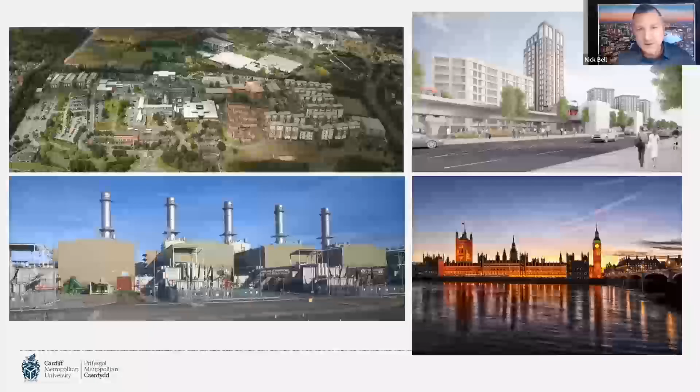So about me, I do lots of talks, or did lots of talks before I retired, about CDM. I talk around my PhD. I talk for professional bodies and I've won awards for my work over the years. I'm honorary principal lecturer at Cardiff Met. We got the University of the Year award in 2021. And when I'm not delivering training, I advise clients and architects and other people on building, maintaining, demolishing, everything from large estates to the Palace of Westminster. I write articles and things like BIM. I rewrote the CDM section of the 10th edition of the RIBA Job Book.

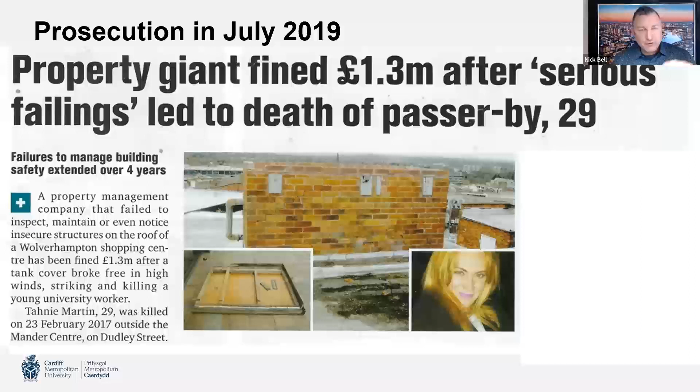So we're going to start looking at a few relevant prosecutions. Some of you may know this case study better than me. One of my clients got a £1.3 million fine a few years ago for their part in killing a woman. The building was the Mander Centre in Wolverhampton - I'll show you that in a moment. It had a number of wooden elements on the roof, which were very difficult to access for maintenance or inspection. So what happened was the wood rotted, it got hit by wind. In the bottom left, you can see the lid of a big wooden housing for a water tank. That got blown off, shunted over the lip of the roof, and it landed on the woman, killing her outside a Starbucks. My client pleaded guilty and got the fine because they accepted they could have done more in highlighting the fact that there were difficult to access parts of the roof.

However, if we do a root cause analysis on this and go all the way back, the original designers came up with a building that had wooden components on the roof that's obviously going to rot, and they built the roof in a way that was difficult to access and maintain. This isn't strictly M&E really, but just to show you the magnitude of the fines we can get if we hurt members of the public.

We're going to move on to look at some case studies and prosecutions around lack of safe access, particularly around working at height. This was a big case study at the time.

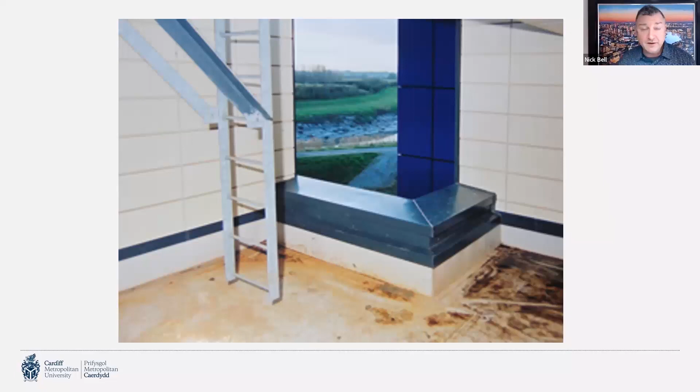An architect got fined for their part in killing somebody. This is a plant room we're stood in, and that ladder is going up to more plant above our head. You can see there's an opening in the side of the building, and from the height of the rungs, that parapet's about as high as the back of your knee. So a mechanical contractor comes in to do some snagging after handover, climbs up the ladder, slips and falls over the parapet onto the back of his head and dies. Completely avoidable death. Turning the ladder around, moving it somewhere else, or actually replacing it with a staircase could have prevented a fatality. And quite rightly, the architect got prosecuted.

This is a masterstroke of design where if we walk up on the left-hand side, we brain ourselves on the concrete planks. If we walk up on the right-hand side, we get lower and lower and lower as we hang on to the hand railing. The final solution was a set of ship's ladders through a coffin lid onto the roof.

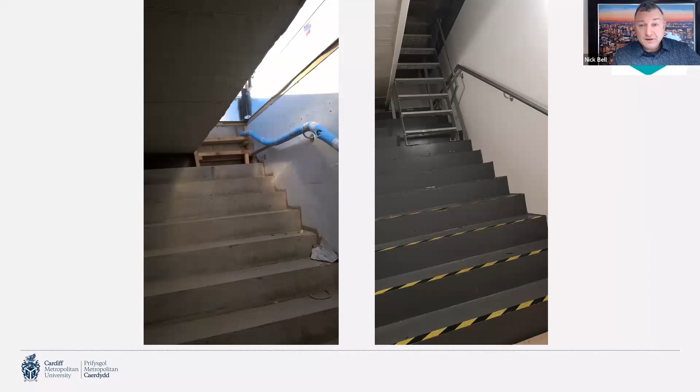We had words with the designers after this had been installed and challenged them by asking them to consider they've got a box of tools, a filter, a spare part of a motor or something on the roof. How do you get it up the stairs? Well, I don't know, it won't fit. Well, that's not a reasonable solution then.

And as a client, we learned from this and created a design guide for future projects, requiring that any access onto a roof where we need to do maintenance should be by extension of the stairwell. We're not going to accept ladders in these kind of situations.

Just a few more case studies, and these relate to coordination or consideration of M&E services. This is a new air handling plant going on to an existing roof. By the side of it is a Georgian wired fragile skylight. An apprentice fell through, broke his ankle or his wrist, but very easily could have sustained life-changing, life-ending injuries.

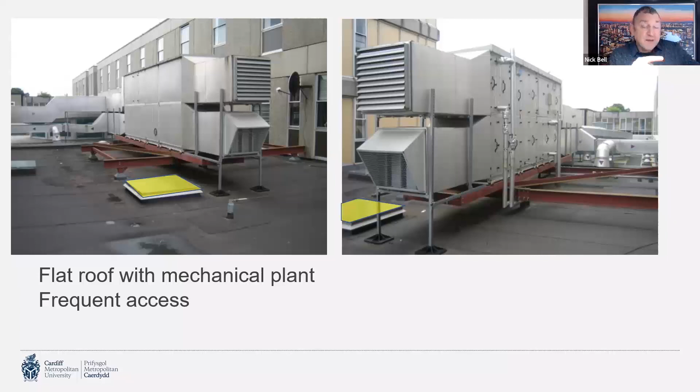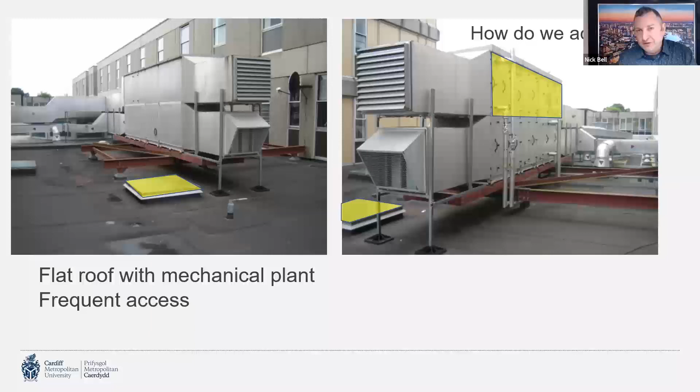So what we have here is a designer not taking into account the wider context of the design, just focusing on their plant, not thinking about hazards in the area that people can be exposed to through the life of this building. Also a complete failure to consider access to these higher cabinets. These units could have gone side by side. If they had to be double stacked, then let's give people a little solid plate across the steels to stand on. At the moment, they're going to be standing on the steel work, tripping over, puncturing the membrane. So not a practical design for future maintenance.

What should be happening instead, this is BSRIA BG6, an image from that guidance note. You may not be familiar with it. It would tend to be used on slightly more complex, larger projects. But at RIBA Stage 2, and I'll talk about the RIBA stages later, RIBA is the Royal Institute of British Architects.

If we don't do that homework, we'll instead end up with situations like this, where we had literally inches between pipes and unistrut. We challenged the design and build contractor, the D&B contractor. Their initial defense was there's nothing in the building regs, mate, saying that you need to give people reasonable access. Unfortunately, it ended up in arbitration. The client won. It was upsetting and expensive. All of that plant gets stripped out, gets replaced. So from a sustainability point of view, it's just awful.

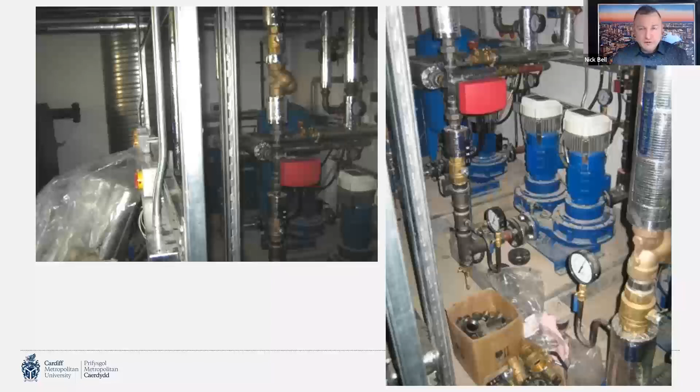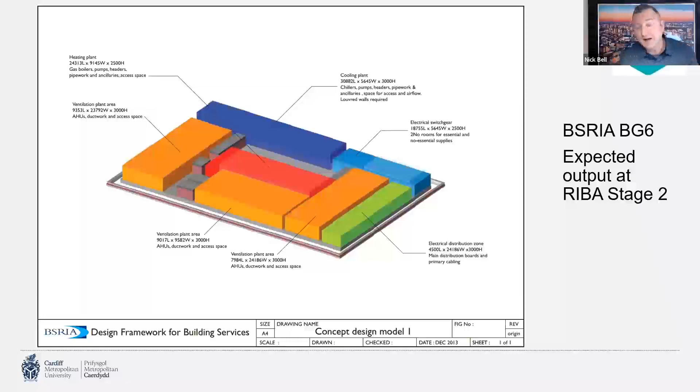And while it was right that we point our finger at the D&B contractor, again, looking at the root cause of this, we could go all the way back to RIBA Stage 2, where there wasn't an adequate analysis about what the actual plant room requirements would be. And then also at RIBA Stage 2, we should understand what the service riser zones are going to be through the building.

So we've set ourselves up for a catastrophic failure. I sat down with the client's principal designer and principal contractor, and in front of the client, they were arguing over who should have been looking after this design. It came across to the client like it was the Wild West, with people just making up their own minds where they put their pipes.

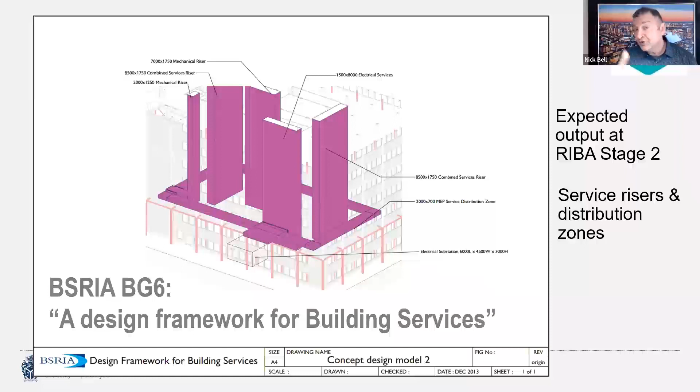If we'd done a proper exercise like this at RIBA Stage 2 concept design, we should have realized early on there was a risk of water services passing over electrical switchgear, and we would have changed the design.

These are water tanks at the top of a very large building. Somehow, simultaneously in the future, contractors will need to hang onto the ladder, reach over, lift up the lid, dip a ladle in to do dip tests for Legionella or other maintenance tasks. Unless you've got three pairs of arms, that's an impossible task. And that further lid is completely inaccessible from the ladder.

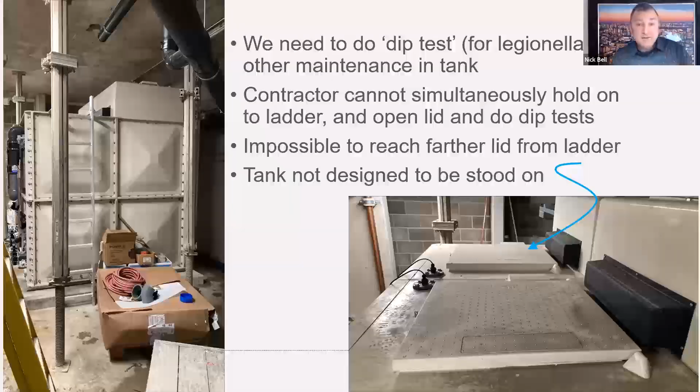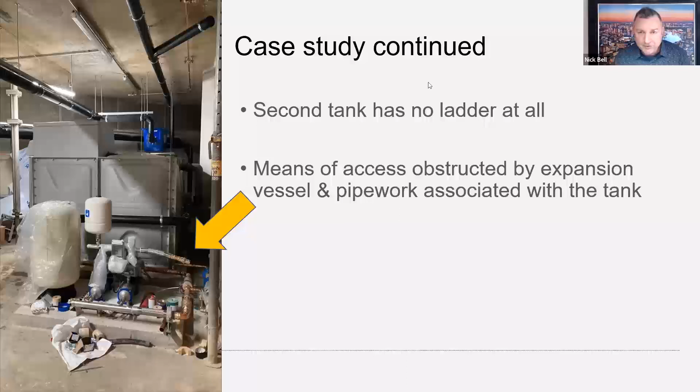And in the same development, there was this second tank. Theoretically, we could have moved a tower scaffold up against the side of this tank to reach the lids, but with all the expansion vessels and pipework, that was just an impossibility. So again, we've got designs that are unmaintainable.

This means that even in the spatial coordination we're doing at RIBA Stage 2 and Stage 3, before planning permission, we should have a clear understanding about the elevation of the pipes within these openings. That needs to be considered alongside things like the fire stopping specification to make sure all of this works. If we don't consider these things early on, facilities managers end up retrofitting fire stopping solutions, and this is just completely woeful.

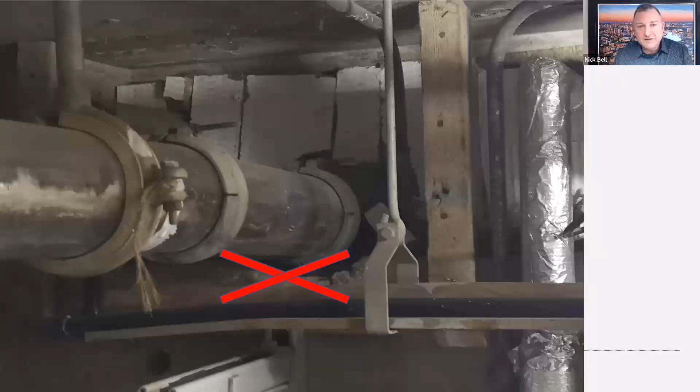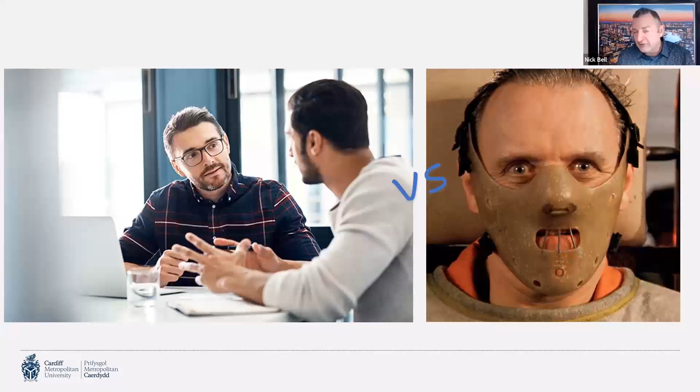So why does all of this happen? I'll get into psychology in a bit, but most architects I deal with, that you'll be dealing with, are professional, humane individuals. They're not psychopaths, they don't want to hurt people, they don't want to create problems in the future, but still things are going wrong. I think we can look at both individual and organizational reasons behind this.

Individually, they might lack awareness due to lack of experience, knowledge, or training. Therefore, they can't visualize the maintenance tasks their designs are going to generate, and therefore they can't appreciate the challenges or risks involved in those maintenance tasks.

From an organizational perspective - apologies, I'm just going to read a wall of text here - facilities management is a bit of a back of house function. It's not making money or providing services for the client, and I think therefore it's not at the forefront of the client's minds. I think other factors get prioritized instead, like completing designs on time to allow construction to start.

I have to wonder whether we always set realistic time scales and resources for projects. If we don't, we're not giving people enough time to consider the whole life implications of designs. And if we're appointing specialist contractors like those fire stoppers too late, we can't incorporate their requirements into the earlier phases of design, such as the location and positioning of pipework within these openings.

I think that project processes are skewed. If you look at a typical template for project meeting minutes, it's probably asking questions like, is the design progressing on time to allow us to start construction on time? There's probably not that many prompts about whether we're happy that the access and maintenance strategy is suitably developed for this stage of design, or whether we're satisfied that the client is aware of and happy with the residual risks this design will leave them to manage. And if you look at things like liquidated and ascertained damages in contracts, people will be punished for not completing designs on time to allow construction to start. If that's what the contract says, clearly that's what they'll focus on, not the whole life implications of their design.

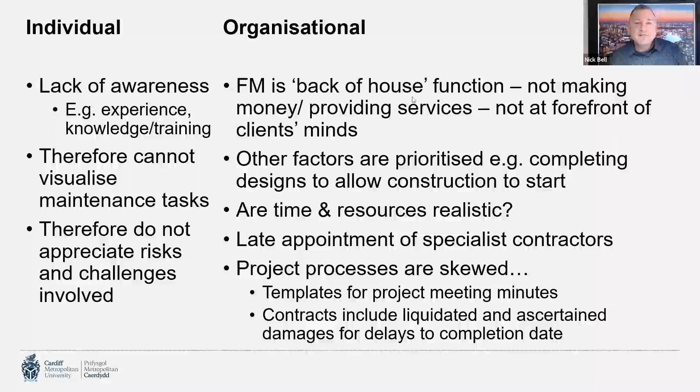I'll talk later about how we can overcome some of these challenges. Oh, it's frozen again, Richard. There we go, well done. We're going into the psychology.

There's something called melioration bias, where we've evolved over tens of thousands of years to survive, partly by prioritizing immediate consequences over distant and uncertain ones. We might see this with teenagers, for example: if I don't study for my exam, I might fail it in some months' time, but that seems less relevant psychologically than the certain immediate consequence of going out with my mates tonight and having a really good time. Those immediate certain consequences feel much more relevant and important to them.

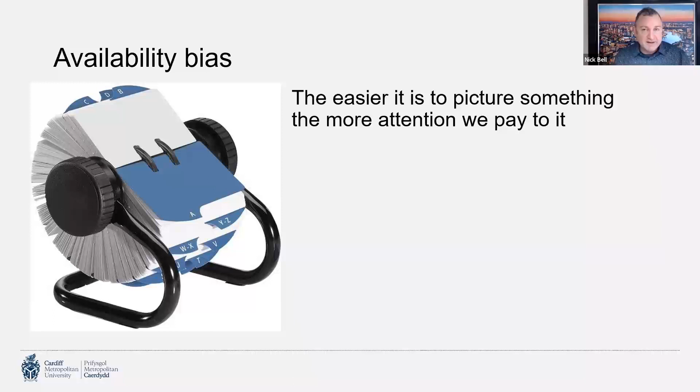This Rolodex is intended to represent our brains. We pay much more attention to scenarios and situations if we can clearly and quickly visualize them. So the way these things affect us: if I'm a designer and I don't complete my designs on time, I'll get into trouble for causing delays to the project. That feels like a really important, certain, immediate consequence, compared to, will somebody have an accident during maintenance? Maybe not, and it's a long way off if it does happen. And if they do have a problem, will I personally suffer any negative consequences? Maybe not. So our brains just won't give that the same attention as those immediate certain consequences.

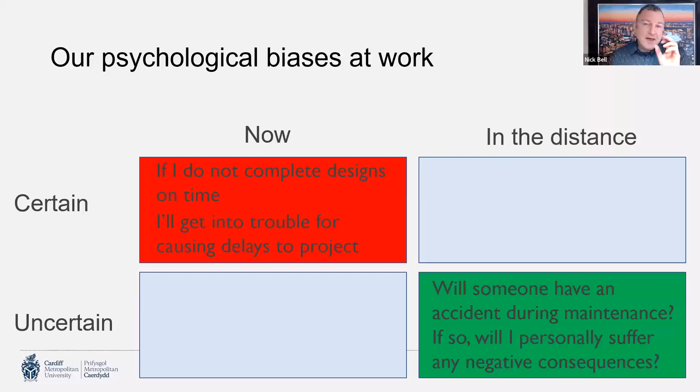So there are ways of overcoming these psychological biases. If we're working with architects, designers, and clients, we might share vivid, realistic stories, such as that Oxford architect's prosecution for a fall from height. That helps people visualize distant, uncertain events and make them feel more immediate and likely. We can do site visits to demonstrate the challenges, risks, and good practices associated with maintenance tasks, helping people clearly visualize them when developing future designs. We can require commitment from designers to post-occupancy evaluations, including a review of maintainability, which makes designers think the consequences of a poor design will lead to immediate, uncomfortable penalties for them. And we can keep a log of challenges and additional whole-life costs a design generates over its whole life, and use that to educate clients and architects in the future.

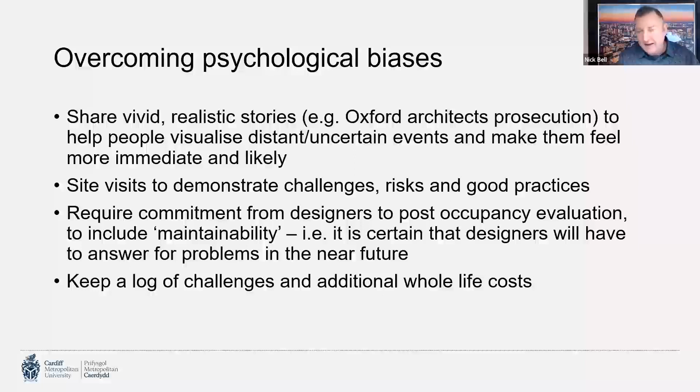A question from Philip on chat: this is being recorded, so you can rewatch it later, Philip. So what should happen instead?

I'm going to give you a quick overview of UK law on CDM. We've got the Health and Safety at Work Act in the UK, which allows us to introduce any regulations we want. When we were part of Europe, when a European directive came out, all countries in Europe had to incorporate it into domestic law. One of those was the Temporary or Mobile Construction Sites Directive 1992, which we turned into CDM 94. It changed in 2007 and again in 2015, and that's supported by guidance.

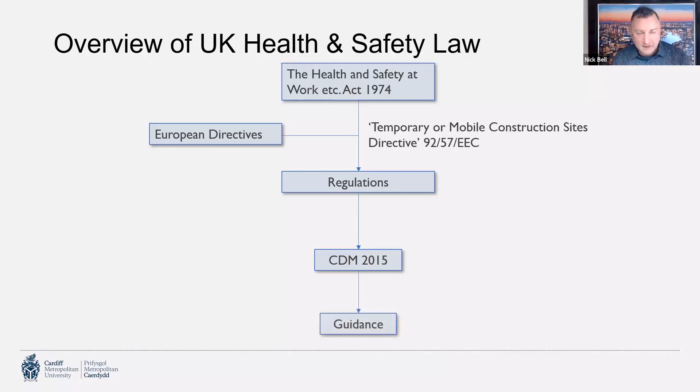Just something to be aware of: because of Brexit, we no longer need to comply with European directives. Jacob Rees-Mogg has come up with this retained EU law bill currently going through the House of Commons. It will then go through the House of Lords and get signed off by King Charles. The intention is that on December 23rd of this year, 4,000 pieces of UK legislation based on EU directives will be switched off overnight. It's going to cause absolute bedlam unless a minister chooses to retain or amend it. That's the default position - if we don't do anything, that law just becomes irrelevant on the 23rd of December.

That includes health and safety law, environmental law, consumer protection law. So this could have a huge impact on anybody involved in the built environment in some way. I would really recommend that you keep an eye on that. If you just type into Google 'EU retained law bill', you're going to see the amount of controversy that it's creating.

Anyway, so CDM. We realized quite early on that construction is quite a dangerous process and also quite complicated because there are so many different parties involved. What CDM is doing for us - that's the Construction Design and Management Regulations 2015 - is identifying the key duty holders involved in a construction project: client, designer, contractor, principal designer, principal contractor. We allocate duties to them and they have to perform those duties in a reasonable manner.

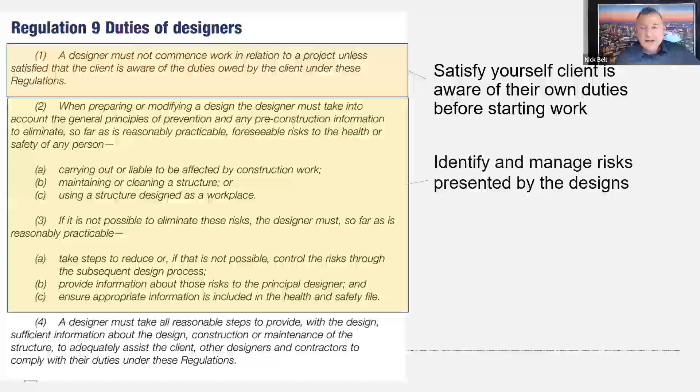So I'm going to look at the designer's duties. I'm not going to go through this line by line, I'm just going to pick out 3 key bits that are useful to be aware of. Designers have to satisfy themselves that clients are aware of their duties. They have to identify and manage risks associated with their designs, which we'll look at in a moment. And they have to provide information with their design to allow other people to comply with their duties, which could include, for example, developing access and maintenance strategies as part of the health and safety file.

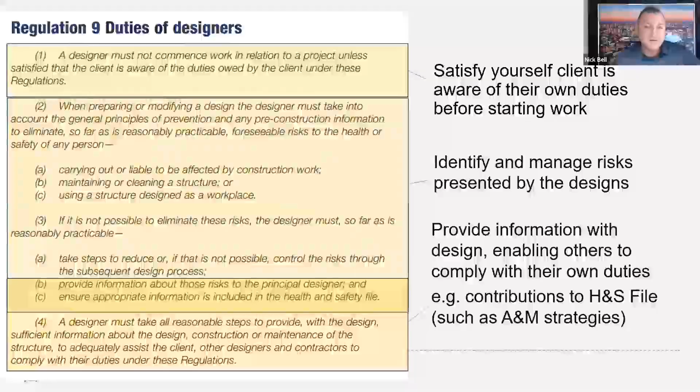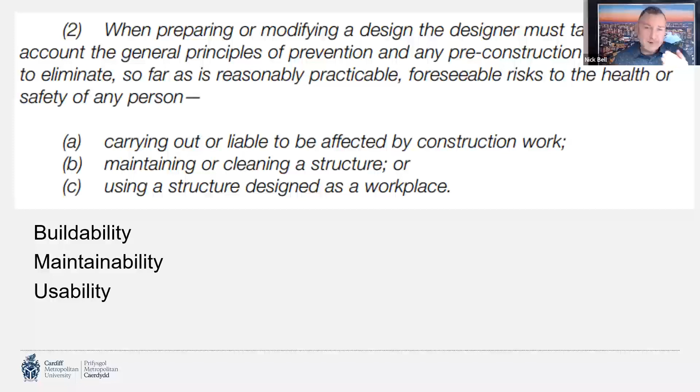Dipping into risk management in a bit more depth, they have to think about the risks their designs present to the people carrying out or liable to be affected by construction work. So that's contractors now or in the future, people maintaining or cleaning a structure, or using a structure designed as a workplace. In summary, they need to think about buildability, maintainability and usability.

To help them comply, we've got the wording of the law itself. We don't really ever look at that because it's embedded into L153 - that's the document on the right. That's the HSE's official guidance on how we comply with CDM. And then on top of that, we've got industry guidance for each of the duty holders named in the regulations. We're going to dip into the designer guidance in just a moment.

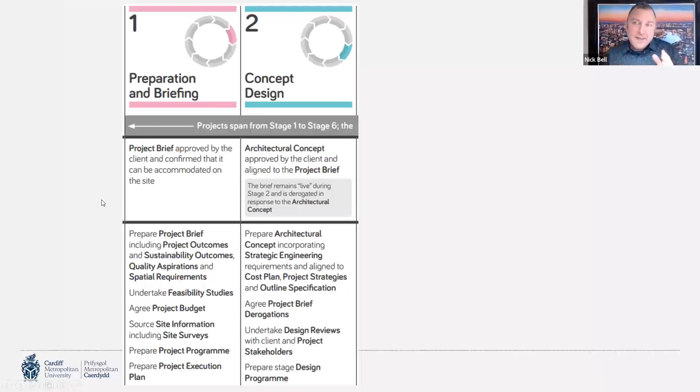And then this is the RIBA's plan of work. This is setting out the key work stages that architects would be working to as they're developing their designs, and then we go into construction and maintenance afterwards. I'm going to focus on stages 1 and 2 - this is basically feasibility studies and concept design. This is long before we get planning permission. We need to be thinking about project strategies, and we should have a principal designer in place from RIBA stage 1 to help us with things like gathering site information and feasibility studies.

So those project strategies include things like considering safe occupation and maintenance of our buildings. Sometimes it doesn't happen, but architects' own professional bodies are saying to them that as part of the concept design, we should be considering how we are going to maintain, access and replace bits of plant on these designs.

Now we're going to dip into the industry guidance for designers. These are freely accessible off the website. At the back of the designer guidance there's something called the RAG list, the red, amber and green list. Red list items are design features that the HSE really wants us to eliminate wherever we can. We'll look at a couple of examples and then move on to the amber list items, which you can have, but you'd need to justify them and should try to remove them from the project if you can.

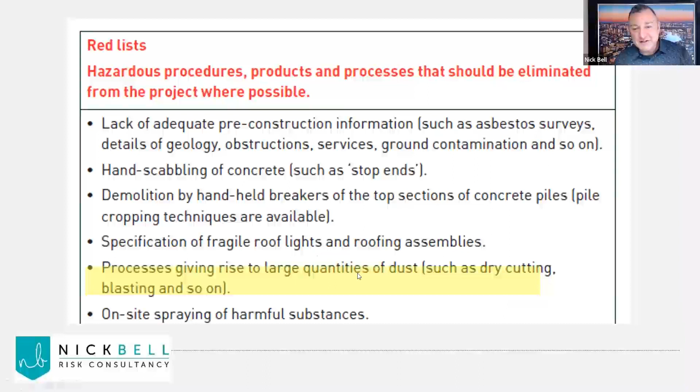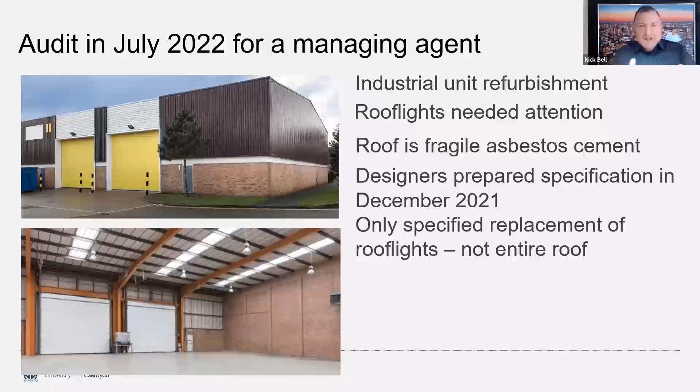A red list item should be highlighting specification of fragile roof lights, and roofing assemblies instead. This is an audit I did last year for a managing agent, a Cat A refurbishment of an industrial unit. The roof is fragile asbestos and the roof lights needed attention. The designers prepared their spec in December 2021, but they only specified the replacement of the roof lights, not the entire roof. So what we have are really energy efficient, strong, robust roof lights surrounded by fragile asbestos.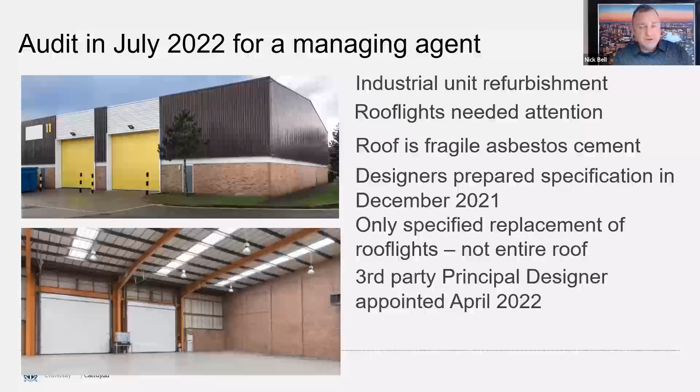The third-party principal designer was only appointed in April 22, so we had about 4 months of designs developing with no one keeping an eye on those designs or the designers. I'm going to have a look at the risk register entries with you. What you're going to see is how the principal designer is basically telling a competent contractor how to do their job. There's no consideration of risks to future maintenance workers or risk of asbestos exposure to occupants, and they're not providing any design responses like, why not replace the entire roof? What was the justification for keeping the fragile asbestos roofing material?

So this is the entry around the roof structure: principal contractor to undertake a fragile roof survey. Well, we know it's fragile, it's asbestos cement. Fall arrest netting to be installed - so they're saying to a competent principal contractor, you've got to stop people falling to their death. They know that, but why are we keeping this fragile asbestos cement? No justification at all.

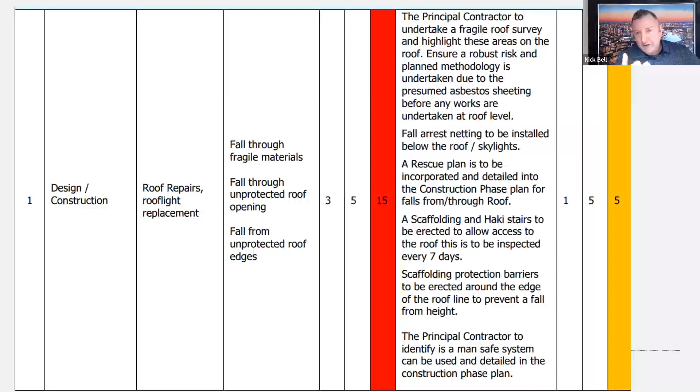And then when it comes to the asbestos, they're essentially saying to the competent contractor, they've got to carry out asbestos surveys. Well, we know it's asbestos cement. You've got to have risk assessments and method statements for working on asbestos. They know that, but what if we damage this material in the future? What's the risk to the occupants? Shouldn't we have done something about it now? Actually, over the whole life of the building, replacing the entire roof with a much more energy efficient roof would probably save the occupants, the client, a lot of money. Anyway, I'm going to start ranting if I don't move on.

Red list items continue: design of roof mounted services that require access without provision for safe access. We saw an example earlier with that ship's ladder through the roof, through the coffin lid. I'll show you another example in a moment, and then we'll talk about glazing that cannot be accessed safely.

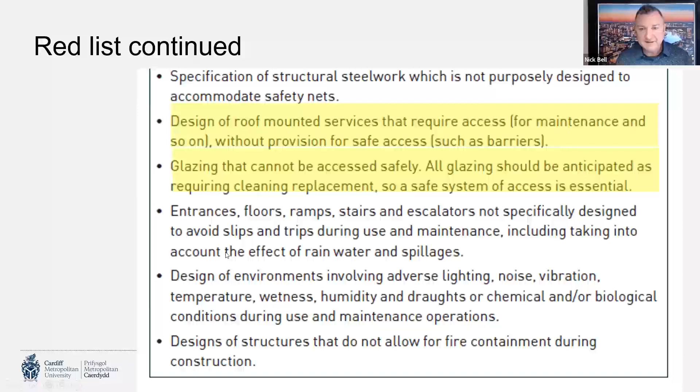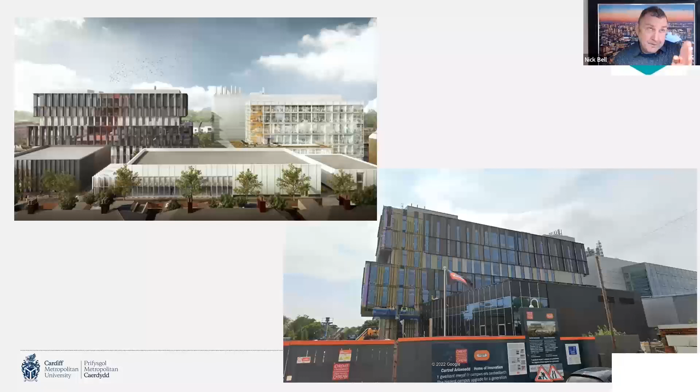By pure chance, I was working as a consultant for the architects doing the landscape design for these new buildings, as well as the designers for the buildings themselves - they've been built now. At an early stage, I met with the landscape designers and saw it looked absolutely beautiful, with trees, planting and planters - a wonderful landscape design. I then met with the designers for the main buildings, and looking at the concept design, I could see there was going to be a load of plant on the roof.

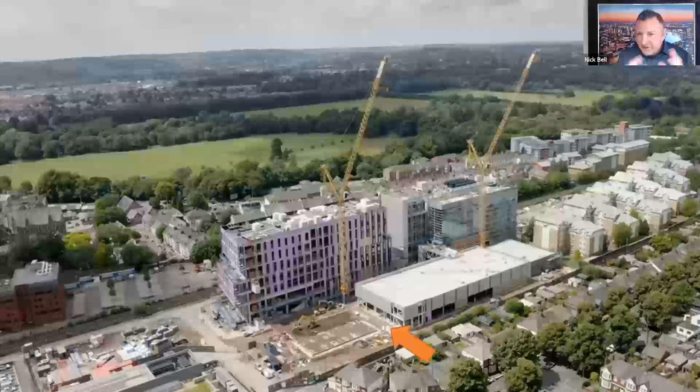I said to the designer, how are we going to replace those in the future? Oh yeah, we'll just bring a crane in to that courtyard area. I said, during the construction phase it's easy to get cranes in - the area around the building is fairly unrestricted. Once the building's been built, it gets a lot more complicated. On this particular site we had a train line on one side, with a strip of land like an easement area away from the train line that we couldn't put any plant on, and this very restricted access into the inner courtyard.

So I said to the designer, can we actually get a crane into that courtyard? Don't know. Well, let's go off and get a study done - like a tracking study - to make sure that can work, and can the landscape take the imposed loads that crane would put on the ground?

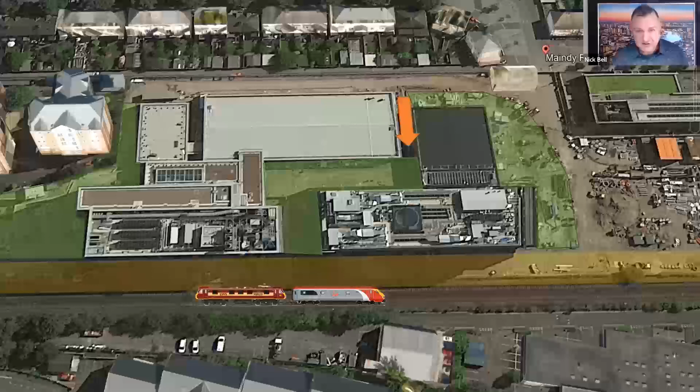I know it can't, because I've spoken to the landscape designer. We sat down with the designer for the building and the landscape designer, and they worked together to make sure we could actually get the crane to where we needed to get it, and that the ground could take those loads. That involved getting a specialist crane contractor in nice and early to help with these deliberations.

And then, glazing that cannot be accessed safely. This photo was taken towards the end of the construction phase. Three years before this, I met with the client, looked at the concept design, met with the designers as well, and pointed out there were windows above the canopy. So I said to the designers, how are we going to get to those windows to replace them or clean them?

Don't know, Nick. Can we have them internally beaded? Oh no. Can we have them tilt turn? That's outrageous, Nick. I said, okay, fine. I'm not the principal designer, I'm not a designer, I'm just advising you and the client — you need to have a functional strategy.

So I come back three years later, take these photos, and say to the designer, what was the strategy? Bloody hell, yeah, we forgot about that. So then they went into panic mode and started coming up with whatever ideas they could.

And then they said, could we have somebody standing on that canopy? It was fragile, they couldn't. Can we have somebody standing on that canopy with ply sheets? Well, it wasn't designed to take that load. Can we have somebody standing on the canopy with ply sheets and a back prop down onto the landscaping? The landscaping hadn't been designed to take those loads either.

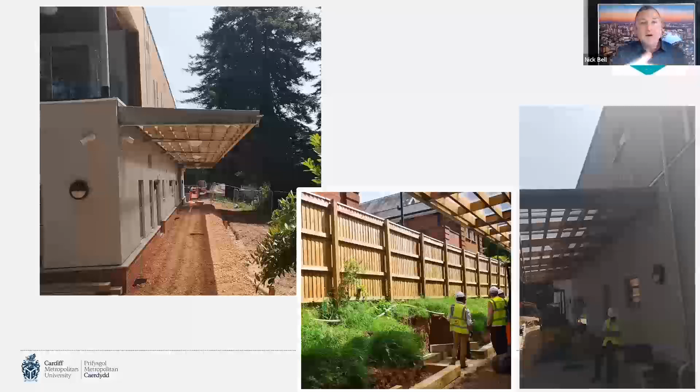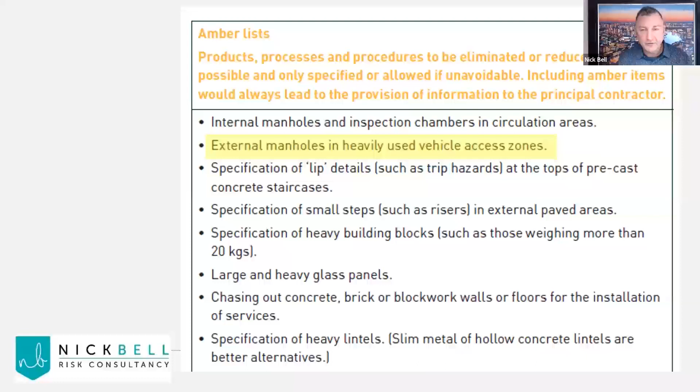And now we're on to our amber list items. These aren't things that are banned, but things that need careful thought. We'll start by looking at external manholes.

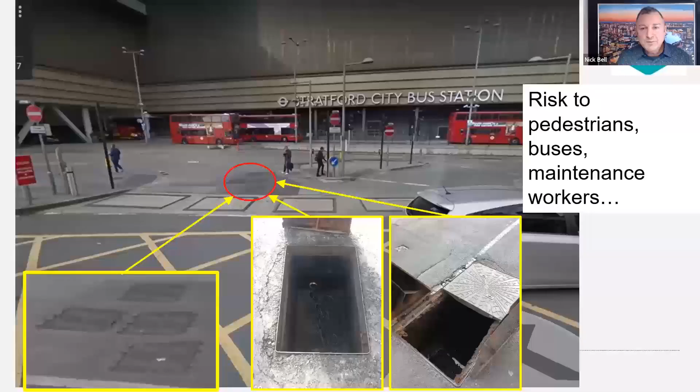So the manhole covers are within that red square. You can see in the incoming lane, you can tell from the tarmac there's already been some repairs done. Zooming in again, those central photographs show you how the manhole covers are collapsing because of the sheer punishment they're getting from the buses.

So there's clearly going to be risks to pedestrians, buses, maintenance workers. I mean, from a maintenance point of view, what do we have — maintenance workers popping up and down like lemmings trying not to get run over by buses?

I think what's gone on here — going back a slide — there's probably been inadequate coordination early on between the main infrastructure designer and the bus station designer. If they'd spoken with each other early on, theoretically we could have had those pipes running under what would eventually become the footpath, so the manhole covers would be in a much safer position.

Or, more likely, those infrastructure routes had already been agreed. What the bus station designer should have done is referred to those plans as they were developing the bus station, and then they could have moved the incoming or outgoing lane up or down the road, which would have had the effect of engulfing those manhole covers within the pedestrian footpath — meaning we wouldn't have the risk we're currently having to resolve.

In the end, my client could only do another repair. It was just way too complicated to remodel the entire bus station. So we just did a repair, knowing that within five years we're going to have to repair them again.

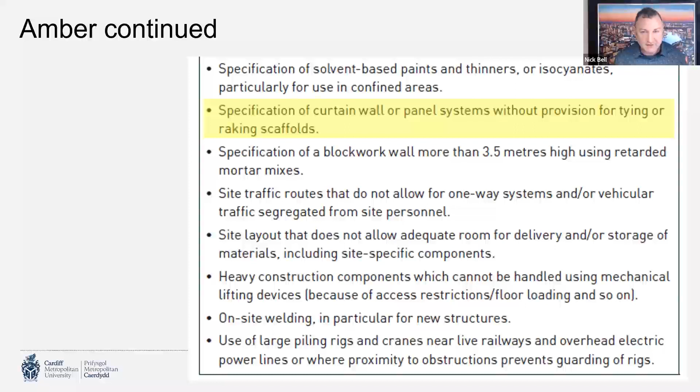Another amber list item would be specification of curtain wall systems without provision for tying or raking scaffolding. Here they're just doing a snag, replacing a defective window. First, they could have done it internally beaded, meaning we don't need to get at it from the outside. If that wasn't feasible, they could have selected a cladding system with pre-installed eye bolts or connection points, meaning we have something to tie our scaffold into. Because they haven't done that, we've had to come up with this great big mega structure to get access up the side of the building.

Or they could have specified the use of mobile elevated work platforms. But again, that would have considered things like access routes into this area and the ground bearing capacity of the landscaping.

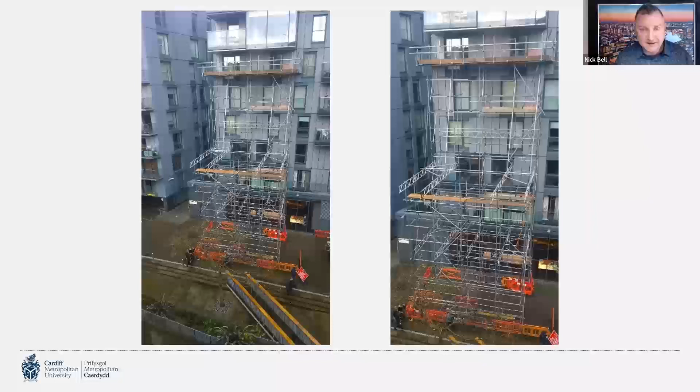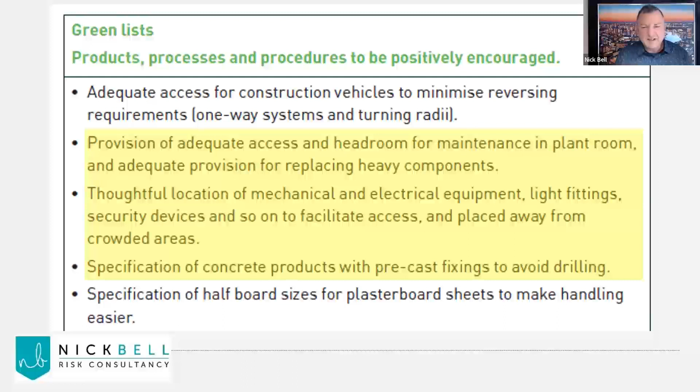That means we're going to have to do all of this job in the evening or at the weekend when people aren't around, and we're going to have to drag a tower scaffold up there, because the step ladder is no longer going to be acceptable. So we've completely needlessly created a risk that we needn't have. What they could have done instead is beefed up the lights from the wall, or done some uplighters, to avoid putting the lights in a position of danger.

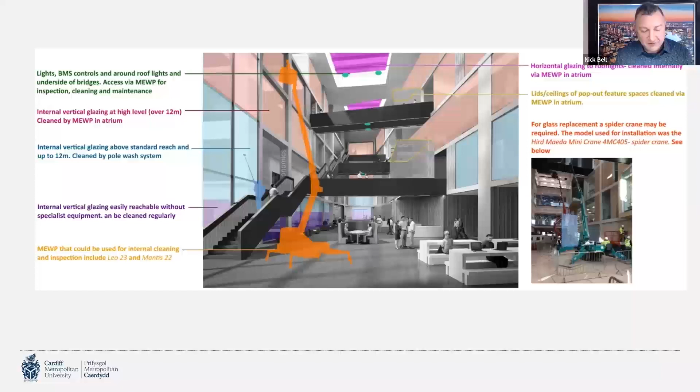So here, going back to a big building, it's got a big atrium. One of the positives to take away from this is this image from an access and maintenance strategy where they've used a graphic to illustrate the different types of activities we would need to do to maintain this atrium. Unfortunately, this was only presented to the client once the building had been constructed, which isn't good.

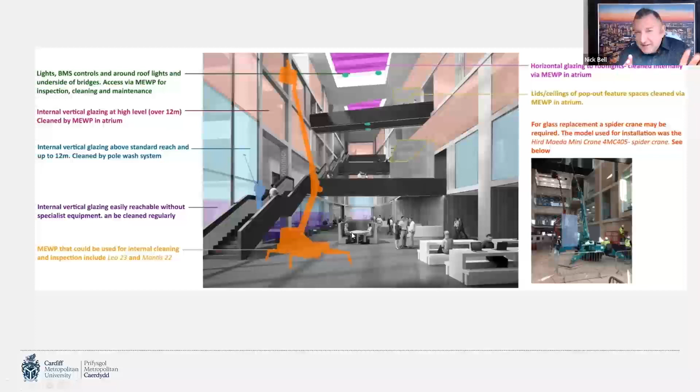We're going to have a look at the MEWP in a bit. So in this image it looks kind of cute and cozy. Another positive was their floor loading diagrams, so we knew from the designers what loads the floors could take in different areas.

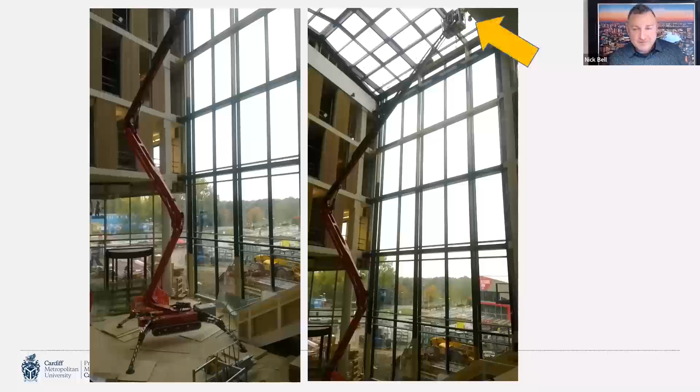This is the MEWP, the mobile elevated work platform, that they were using to install the lights. At the top of the atrium is a light bulb. That is a monstrous MEWP. We said to the D&B contractor, how are we going to maintain that after completion? Their response was, oh, it's LED, it's going to last for the life of the building, mate. A year and a day after handover, that light bulb pops.

The D&B contractor's response was partly to try to blame the client, saying oh, we gave you the BIM model, you should have seen it was a problem. Like, really, you're asking the client to troubleshoot your design.

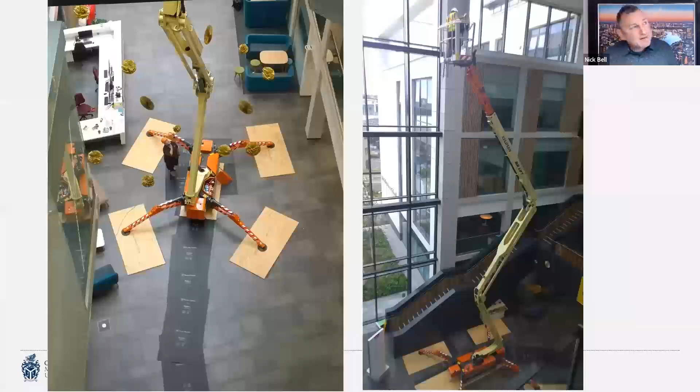When it came to replacing that light bulb, it was a really tricky job. By this point the doors had been fitted. Also, we were really worried about damaging this very, very expensive floor finish. So this is the smallest MEWP we could get to underneath the light and still reach it. That meant it was at its full maximum capacity.

So the guy in black you can see on the left should have been in the basket, but it kept tripping out the safe working load every time he was inside it. So there was this electrician swaying around at the top. All of these ply sheets and the floor protection get thrown away afterwards. It has to be done out of hours on the weekend when no one's around, because of the risk of falling objects. It was like a whole day and three to four grand to replace a single light bulb. Not good.

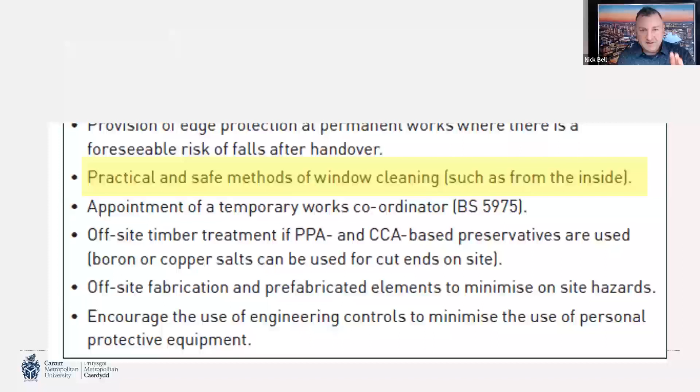And just another green list item, which we talked about, practical and safe methods of window cleaning, such as from the inside. So, in summary, this is the sort of advice that designers are getting to help them get the design right at concept stage.

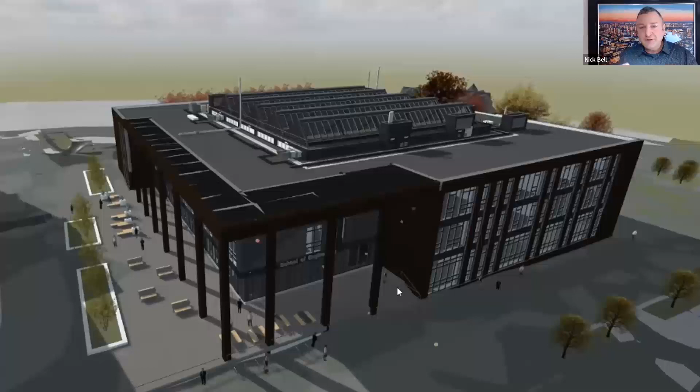Before planning permission, some good practice is the use of building information modelling. This big new building went on to get the 2021 British Construction Industry Award, and it was modelled within BIM, which is a really useful tool to troubleshoot the design from a buildability and maintainability perspective.

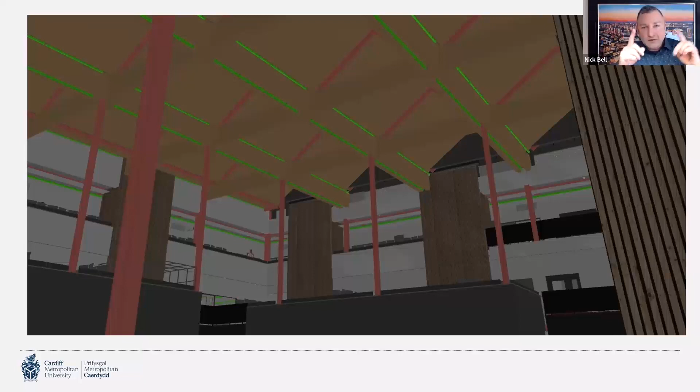This is a later iteration of the BIM model, but even at an early stage we could say to the BIM model, please turn any lights green and blink, and we could drive around it and say how are we going to maintain that, how are we going to access that. Or you could say that any asset with some sort of maintenance life, where the maintenance period may be anything higher than zero, we turn it pink, and we can then drive around and challenge the designers to give us a solution for access and maintenance.

If you're really into BIM, you'll be familiar with PAS 1192-6, which is a suite of documents helping us use the BIM model, and how we can use BIM to highlight health and safety issues. You could take a model like this and attach hazard symbols to it to highlight where the access and maintenance challenges or activities might be. I just find it really useful.

I've mentioned a principal designer a few times. What they should be doing is acting like a facilitator or a critical friend during the design process. So they'll be asking designers questions like, what information do you need to come up with a safe, functional design? Now that you've got that information, crack on with the design, but what do you think are going to be the key risks for the people who are going to be using it, maintaining it, building it? Now that you know what those risks are, what do you think would be reasonable solutions?

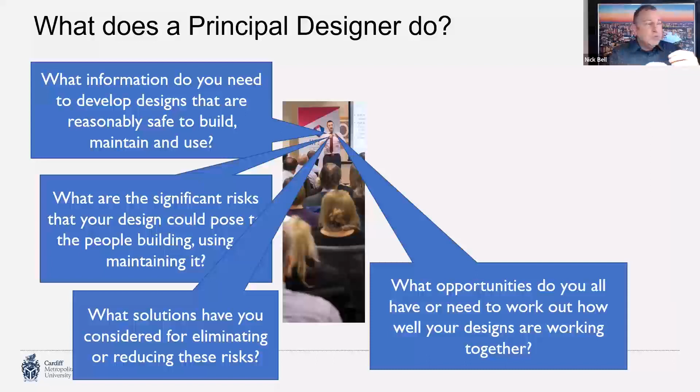Generally, designers are competent in their own right. It's when we stick designs together that we get our problems, and we saw that earlier, particularly around the M&E designs or Westfield Shopping Centre with those manhole covers. So what opportunities do you have or need to work together? Are we introducing you into the project with enough time or in the right sequence to get your designs working together? Do we need to have weekly or fortnightly coordination meetings?

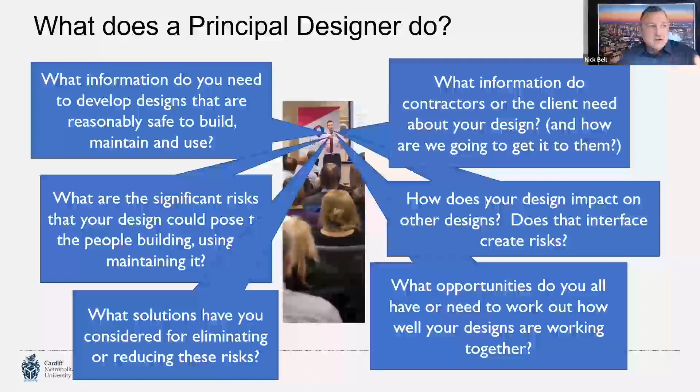Now that you are all working together, how does your design impact on your design, impact on your design? What are the risks or challenges that come from those interfaces, like the landscape design for those big university buildings affecting crane access for the roof mounted plant? So how do we overcome those challenges, and what information will the client or the contractor need from you about your design to carry out their own duties? So what information would we put into the access maintenance strategy?

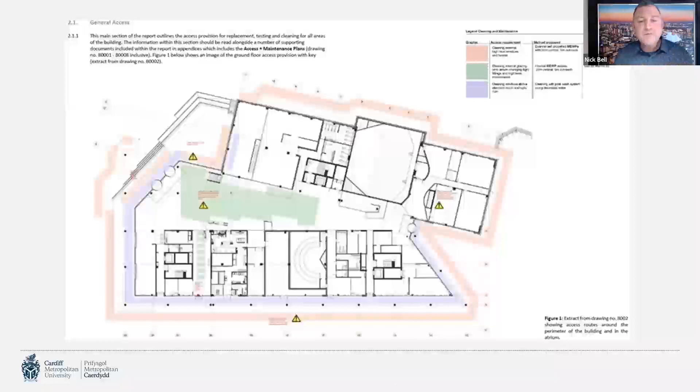One positive from this design was in the health and safety file, we had these different coloured lines around our building showing us how we would access different elements. A year and a day after handover, a window just spontaneously broke. By looking at the health and safety file, there's a cross-reference to the O&M manual where we had a schedule of all of our windows.

The health and safety file said that the landscape had been designed to take the weight of a large MEWP, and we could see from the schedule of windows exactly how big and how heavy that window should be, or how big and heavy it is. So we could order a replacement.

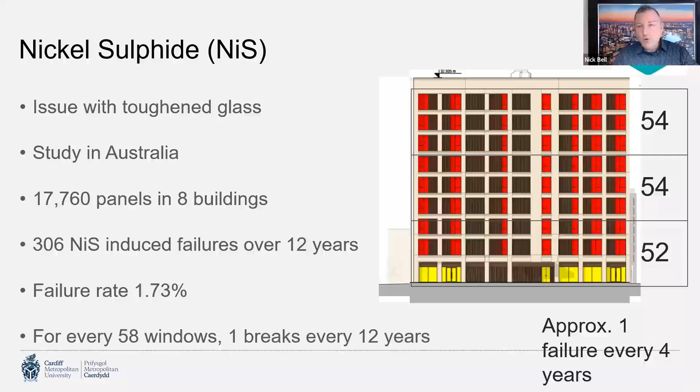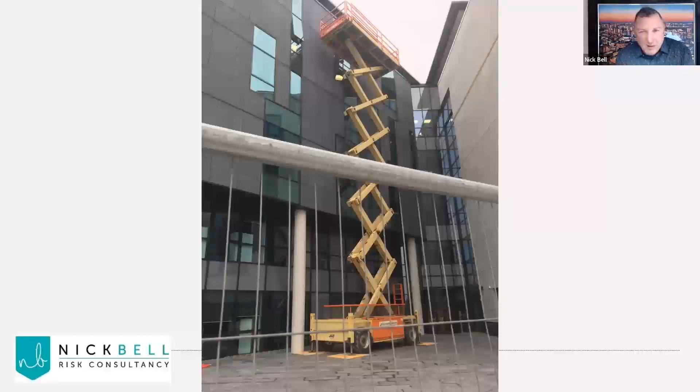So I'm just moving on - that's the MEWP that we use to replace the window. What was happening here was the health and safety file acted as pre-construction information for future maintenance work, which is how it should be used. Depending on how complicated the building is, that will dictate how much time and effort we put into developing access, maintenance, and replacement strategies.

So in this particular project, again around concept stage, we're coming up with this strategy.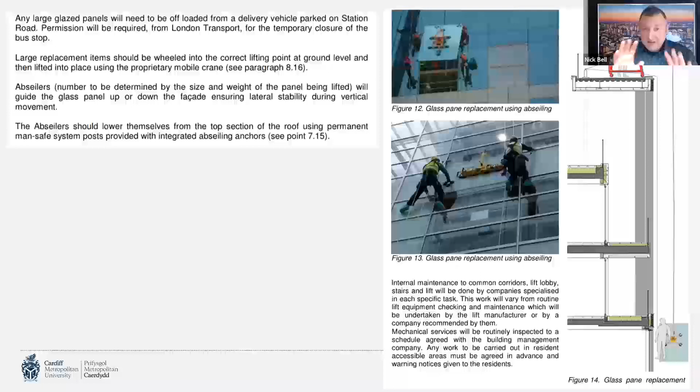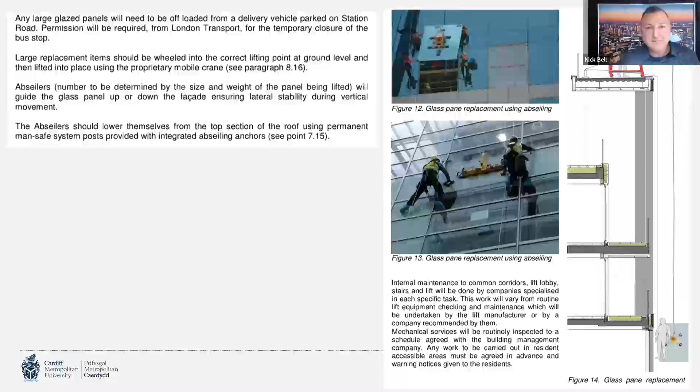Very, very large glazed building in central London, which had like a donut roof around the top, they called it - basically a very large parapet around the roof. Their proposal was to drop abseilers down the side of the building alongside a portable crane system that would lower the replacement glazing. A lot of work went into this strategy.

In the top right, you've got the image of a little crane that we would put on top of the parapet, the donut they called it, to bring the main crane and the glazing panel onto the roof. You would put counterweights into the back and then drop that sucker system with the glazing panel down the side of the building alongside the abseilers.

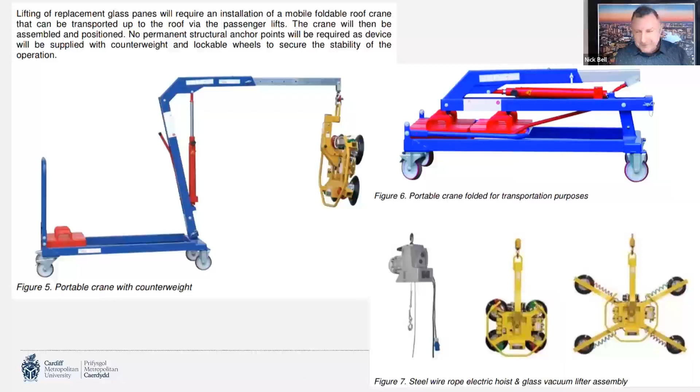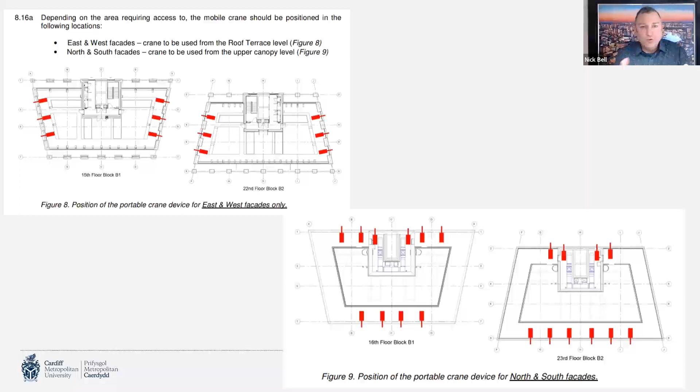So we went to planning knowing that the client had the ability and willingness to maintain it in the future. And it's quite normal to see mixed maintenance strategies for things like window cleaning.

Abseiling, it can be done. Theoretically, cradles are a safer option because you've got handrails around them. But for a building of this size, certainly also considering that you've got these protruding balconies, a cradle system is just not warranted. So abseiling here is completely acceptable and functional as a strategy.

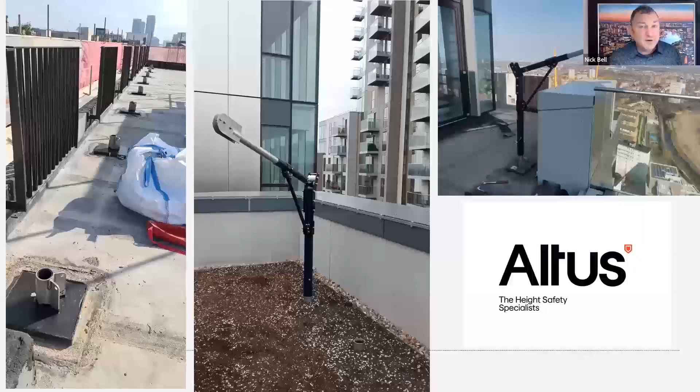But personally, I would have wanted to have seen davit arm systems - I stole these images from Altus. You can have movable or fixed davit arm systems that allow abseilers to come down the side of the building, because at the moment they're having to push themselves feet first over the edge, which is not that easy. There's also a risk of the rope damaging the building, or the building damaging the rope. So a davit arm costs more money, but is a much safer solution.

Yet again, these are the things that the designers should be considering at concept stage. So all of this gets built into the cost plan for the project, and we get planning permission with the planners knowing that there might be these fixed davit arms, rather than us building it, then having to retrofit davit arms, and then the planners saying they're not happy with it because it doesn't look nice.

So we've got these lantern lights. They were initially saying they would be cleaned using a MEWP, that's off the ground. That's not practical. Instead, the solution was having people with Ghostbuster packs on the back where they could use vacuum cleaners to suck out the gutters, and pole-fed cleaners to clean the lantern lights.

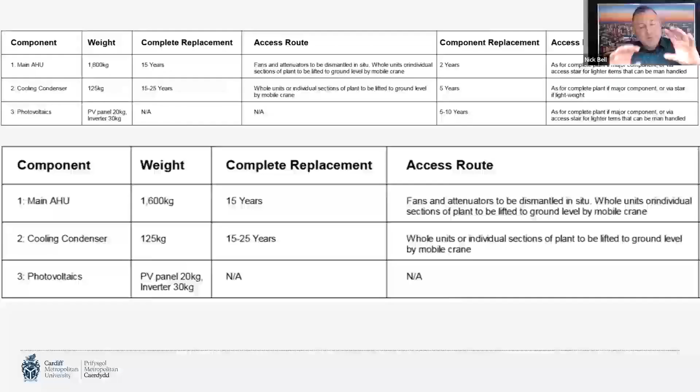And then again, around concept stage, we began work on a plant replacement strategy, which included understanding where a crane would go. This is an early version of the plant replacement strategy, but this is the designers working with other specialists to understand what components would need to be removed from our buildings, what the strategy would be, and how often we would have to do that.

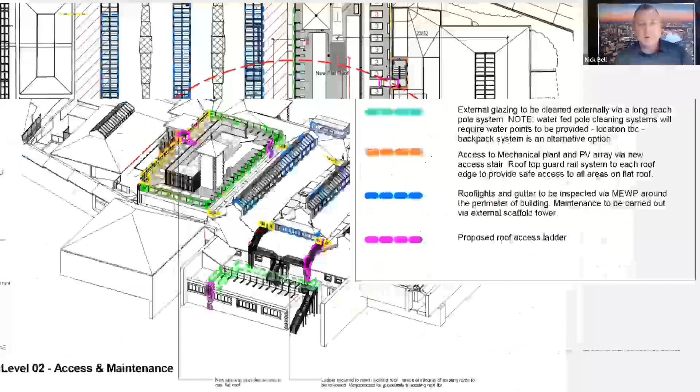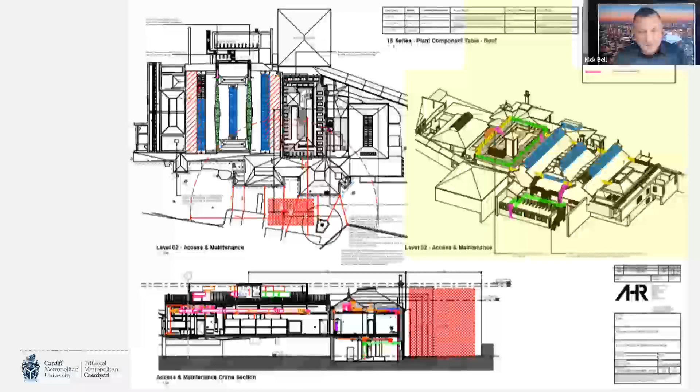So just going back to a couple of images, what that meant was that we had a single page graphic health and safety file, which is so much better than reams and reams and reams of very generic information. So that's really good.

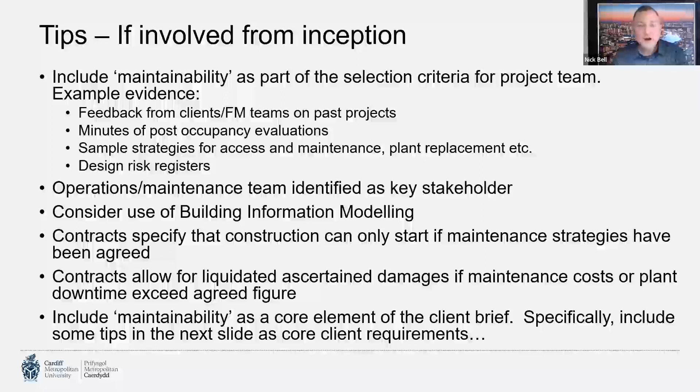If you are involved in the design, we could contribute to maintainability reviews during the design process, so that at the relevant stages in the project we sit down with the designers to make sure that we're happy with what's being developed.

As partners, a client has a legal duty to check that the principal designer is managing their phase of the project, and that's often not done. But what we should be doing monthly, or whatever, is sitting down with the PD and asking them, from a CDM perspective, how are things going?

As part of that, we could ask to review the developing access and maintenance strategy and plant replacement strategies, and the early iterations for the health and safety file, so we don't just leave this stuff to the end. We should be keeping an eye on this all the way through the design process, and we could be asking to look at the design risk register.

We could require costing of maintenance strategies so that we can actually put a figure to what the strategy is going to be. And we can require a commitment to post-occupancy evaluations, for reasons we looked at earlier, in terms of making sure people understand they will be measured based on how usable and maintainable their designs are.

And then if we're inheriting a building, I think this is stuff that most of you as FM people will be really familiar with. Going back to that case study with the shopping centre in Wolverhampton, when we first inherit a building, we need to do a full review of it, including identifying all assets that require maintenance.

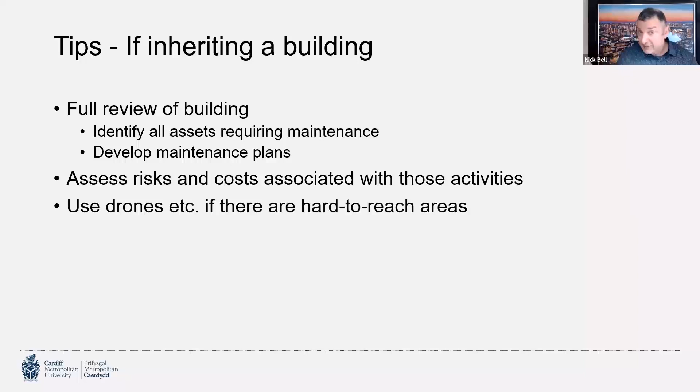We'd need to develop maintenance plans if we didn't already have some from the designers or the client. We would need to assess the risks and costs associated with those activities. Again, thinking about that Mander shopping centre, if we have hard-to-reach areas, I think we should be considering using drones to get to them, not just ignoring them.

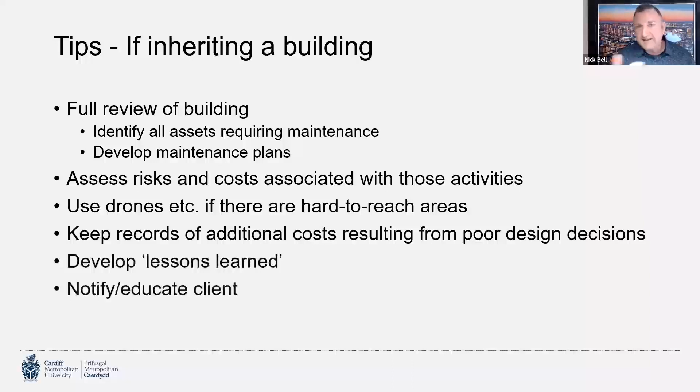I think it would be really interesting and helpful to keep records of additional costs resulting from poor design decisions, and that allows us to then educate clients and designers in the future. Developing lessons learned can be really powerful tools for the clients or for future projects.

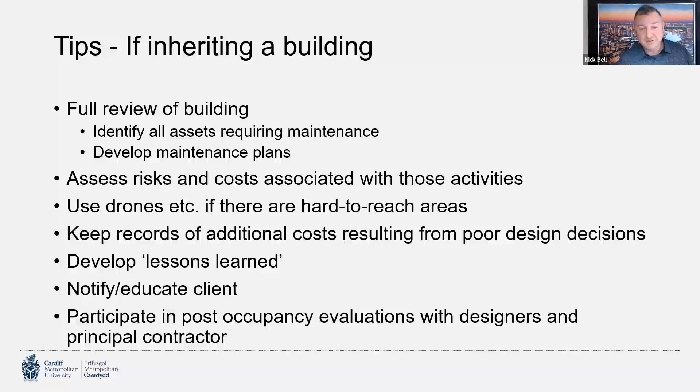And obviously participate in any post-occupancy evaluations with designers, the principal contractor and the principal designer. So that's it, I was quite quick.

So you've done a good job there, Nick, getting us through all of those slides in a reasonable time. Whilst people are thinking of some questions, I've got something worth mentioning.

We've started looking at vulnerability as well as maintainability. You've got manufacturer's guidance of say 15 years maintenance. However, because you're coastal or something, you could take another 5 years off that, and the vulnerability of the asset may affect its maintainability, and that's worth considering early. You may need to think about protecting assets more to prolong their life in certain environments. So I wonder what your thoughts were on that.

No, I think that's perfectly sensible. And again, if we think about the BIM model and the COBie data, what we've done in the past, Richard, is actually put maintenance frequencies against different assets, where we could certainly take those kind of issues on board.

And the other thing that popped into my mind as you were speaking is also thinking about the availability of components over the whole life, because it could be that we value engineer a design. We're offered a cheaper motor, but it's cheaper because it's at the end of its production run, and it's going to be really difficult to access spare components later.

So actually, do we need to hold spares on site of key components of that bit of plant or that motor, keeping spares somewhere on the off chance it becomes unavailable in the future. And you might be able to work out your critical spares supply before you've even started building it. You could see that you're going to have to hold 50 to 60,000 pounds worth of stock because there's a chance this thing won't be available in the future.